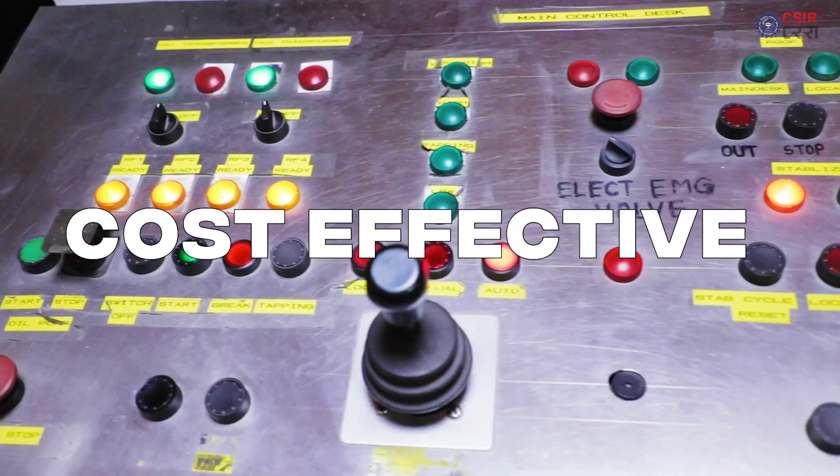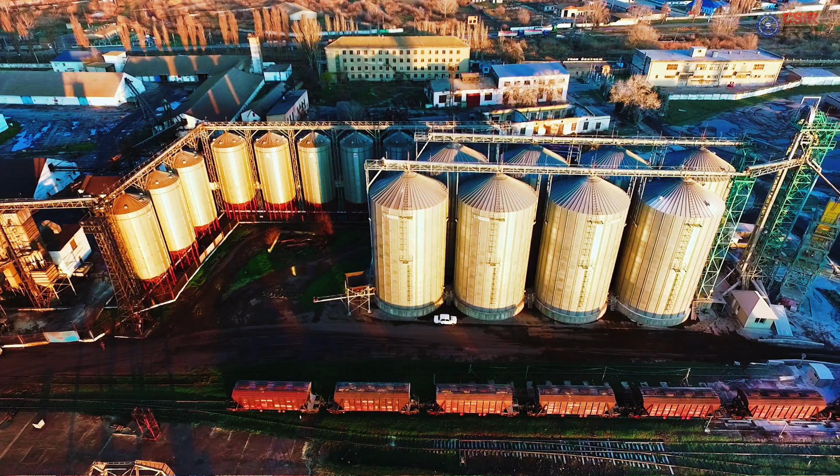Globalization has opened the doors of economic development for so many countries. There is a serious concern regarding how far we are being able to save the environment without hampering its constituents.

India holds world's second largest road network in terms of length. Roads are considered as lifeline of the nation and an important prerequisite to accelerate economic growth. Roads serve as the lifeline of trade and economy. India holds world's second largest road network in terms of length.

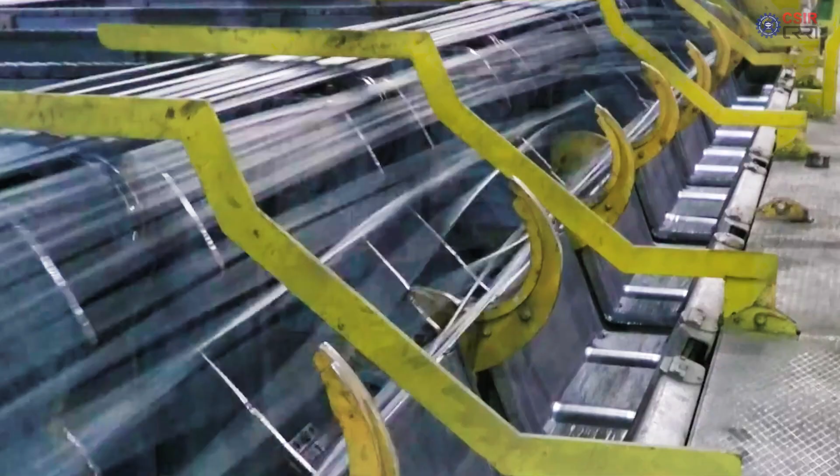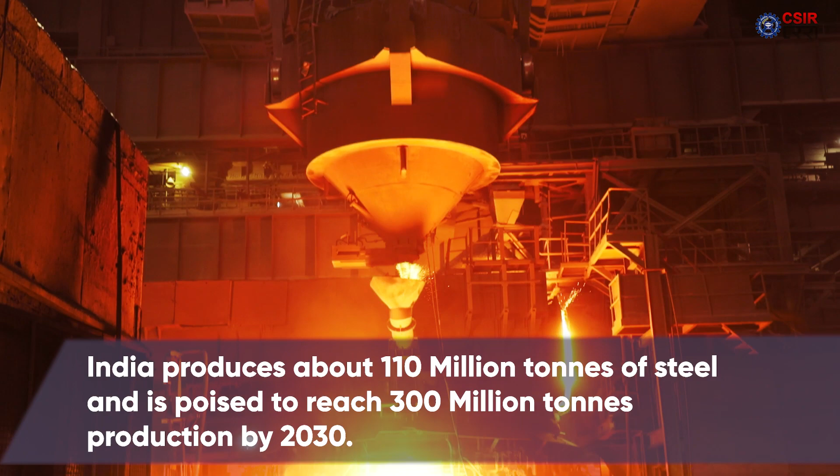Besides that, under Government of India's ambitious road development program such as Bharatmala and National Highway Development Program, massive road development will be carried out in upcoming decades. Iron and steel industry are pillars to a country's economic and infrastructure development. India produces about 110 million tons of steel annually and poised to achieve 300 million tons steel production by 2030.

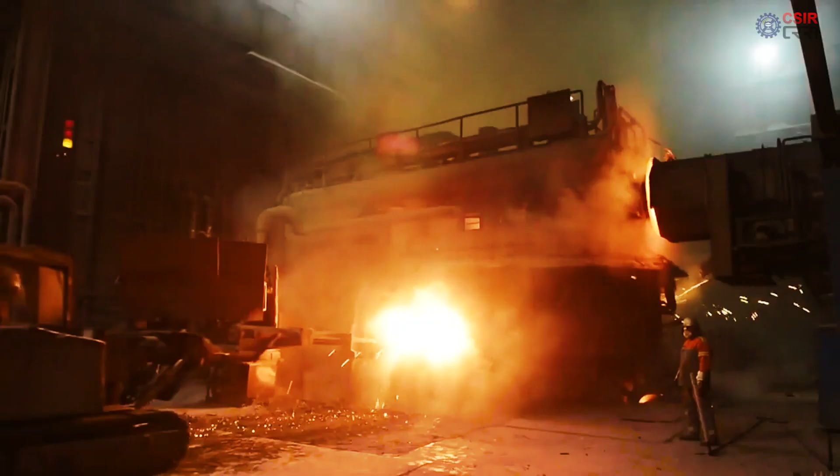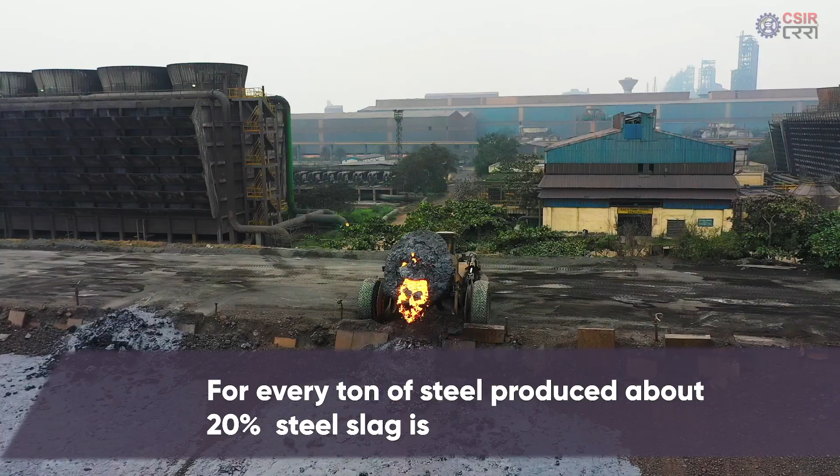Along with steel, about 19 million tons of steel slag is generated every year during the refining process of steel from different steel plants situated across India. For every ton of steel produced, about 20% steel slag is generated. Most of the slag are dumped in the nearby areas of steel plants, which becomes the source of water, air, and land pollution.

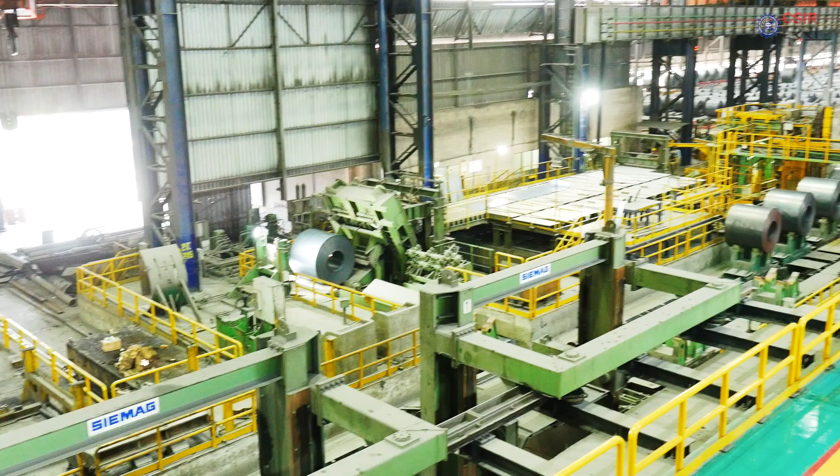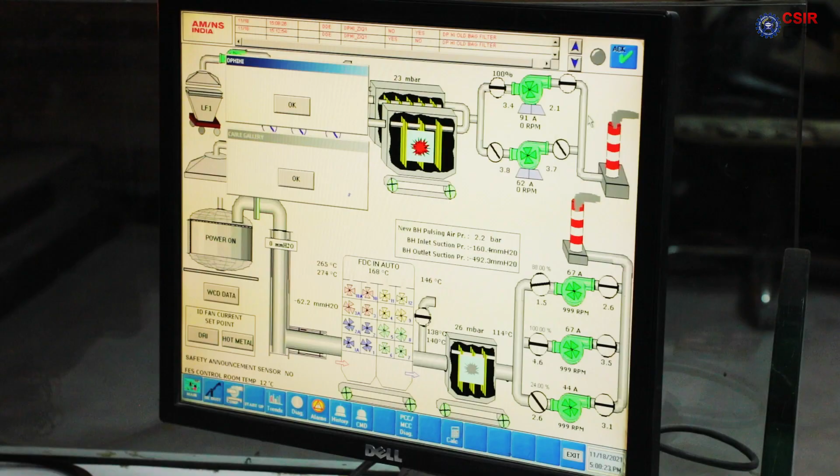India is the second largest steel producer in the world, and presently 19 million tons of steel slag is generated in our industries. So that will be a big solid waste problem for the industries. Therefore, Ministry of Steel, along with 4 steel industries, namely ArcelorMittal Nippon Steel India Limited, Tata Steel, JSW and Rashtriya Ispat Nigam Limited, have come forward and requested CRRI to develop technologies for them so that steel slag can be utilized in road construction.

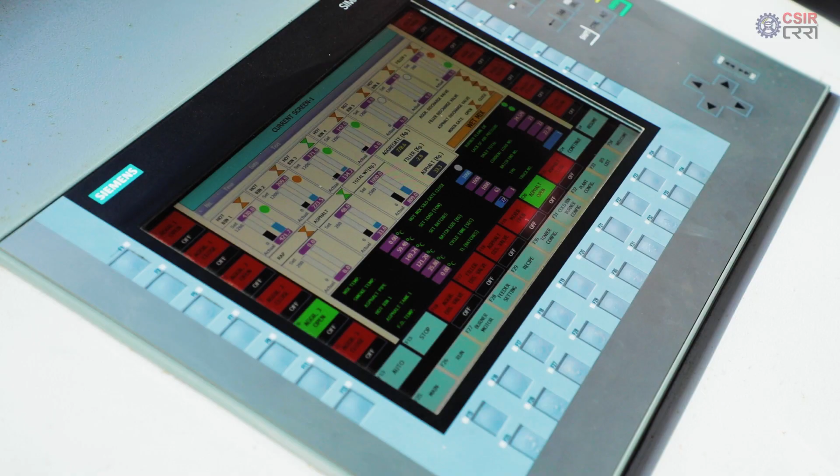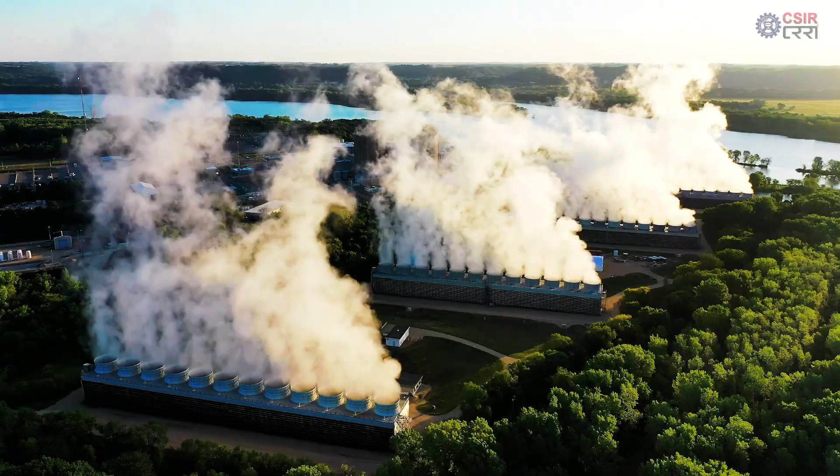Every year, multi-billion tons of natural aggregates are used in the construction and maintenance of road network in the country. The idea of environmental conservation gains real momentum if we can conserve natural resources and use them in a manner that they are sufficiently available for the coming generations as well.

ArcelorMittal Nippon Steel India, under CSIR-CRRI technological guidance and supervision, has shown that processed steel slag aggregates can be used for construction of durable roads, thereby providing a cost-effective and eco-friendly green alternative to conventional road construction materials.

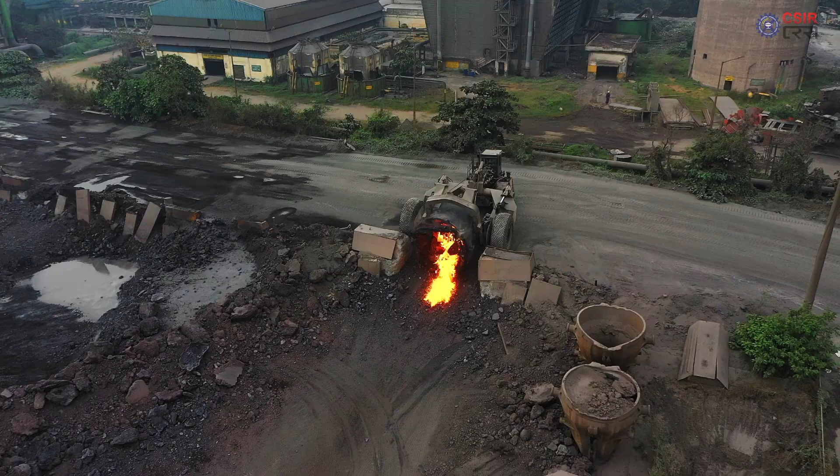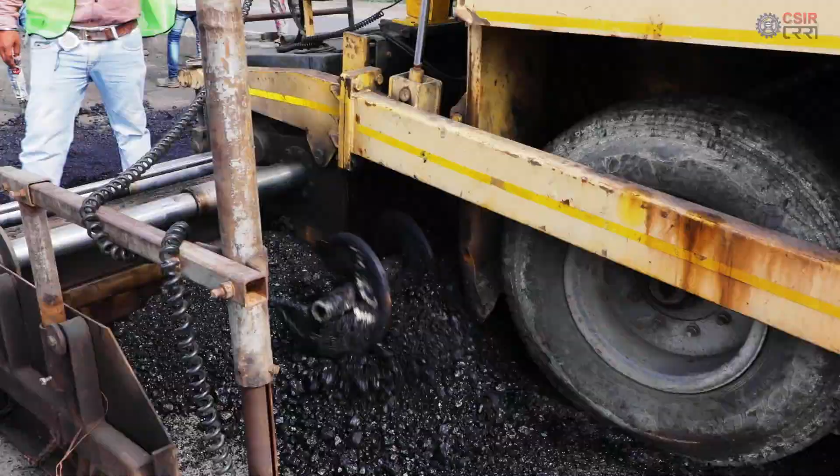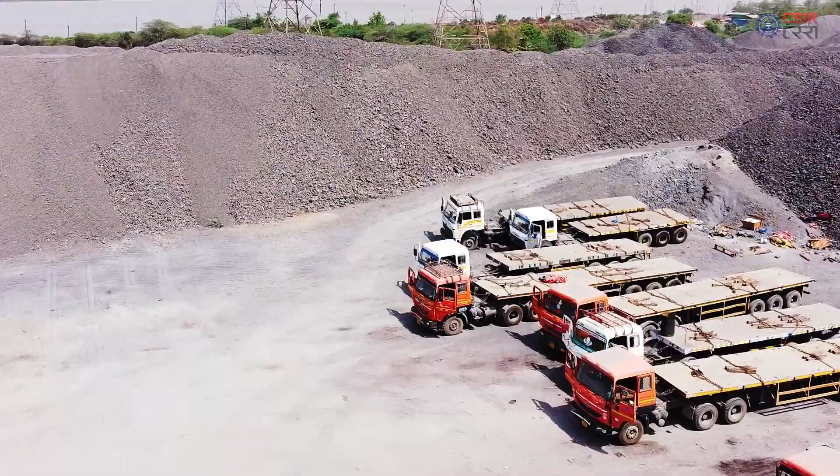Steel slag, which is rich in iron content, can become the source of good quality steel slag aggregates for potential utilization as substitute of natural aggregates in road construction. Despite that, a large amount of steel slag generated from steel industries is disposed of in stockpiles today. As a result, a large area of land is being sacrificed for the disposal of this useful resource. The concept of sustainable development thereby comes into play.

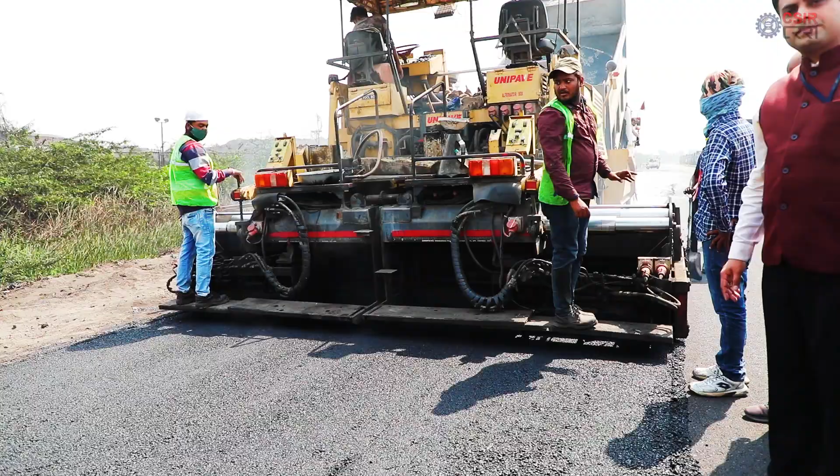Utilization of processed steel slag aggregate as substitute of natural aggregates in road construction has shown quite promising results. Recently, CSIR Central Road Research Institute along with ArcelorMittal Nippon Steel India has constructed a 1 km long 6-lane bituminous road at Hazira, Surat using processed steel slag aggregate.

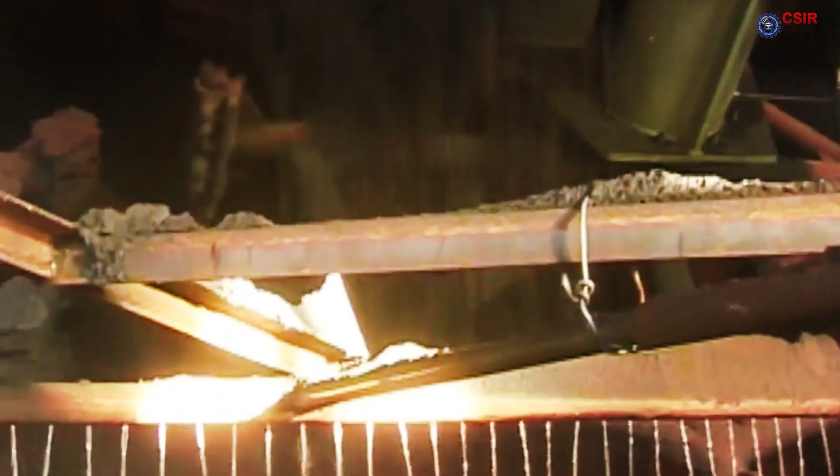Iron ore is sourced from mines and sent to steel plants for first making iron out of it. In the form of pellets, sinter or lumps, the ore is reduced in blast furnaces or DRI plants to form hot metal or sponge iron. This is a raw material for steel making process. During steel making, flux is added to catch the impurities present in iron during the primary refining process.

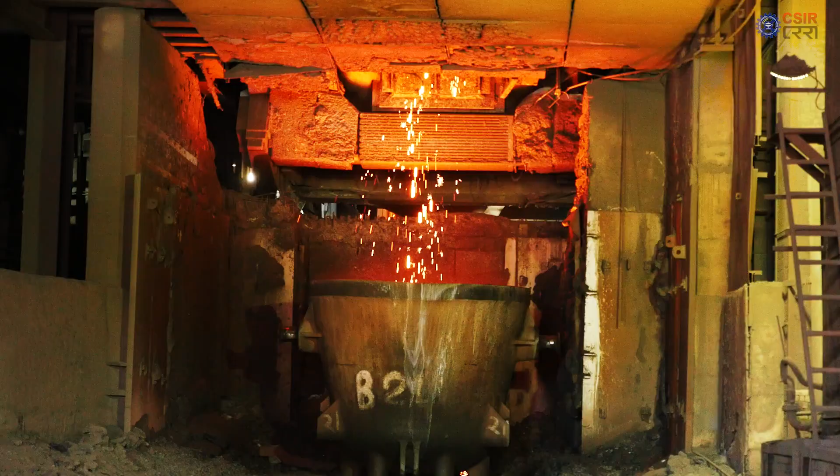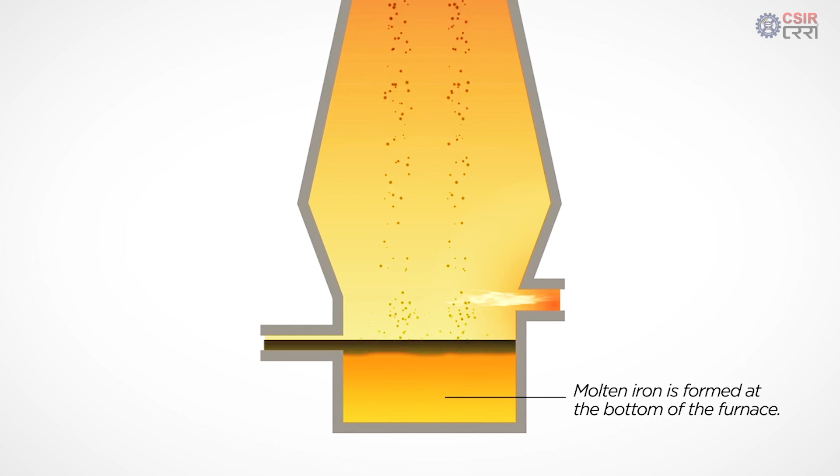The flux along with impurities form a semi-molten mass called slag that floats on the liquid steel in the steel-making furnace. Slag is a mixture of oxides formed by silica, alumina, calcium, magnesium, and iron predominantly. The purified metal is taken out from the bottom and slag is taken out from the top of the furnace. The molten slag at 1500 to 1600 degree temperature is poured into the slag pits for cooling.

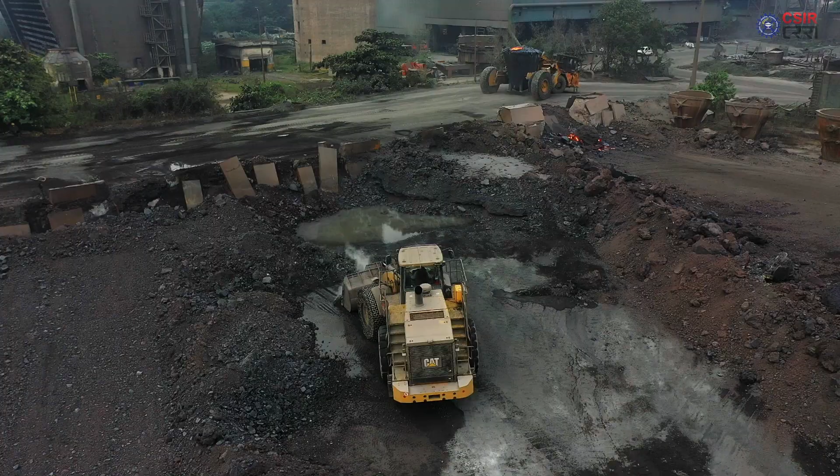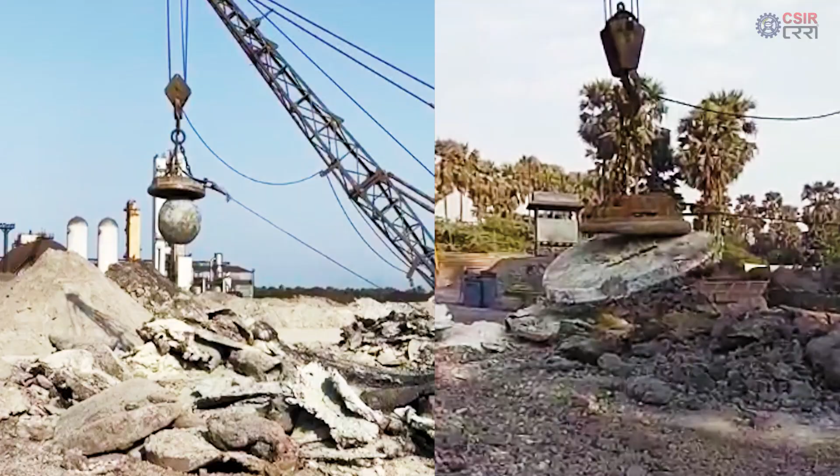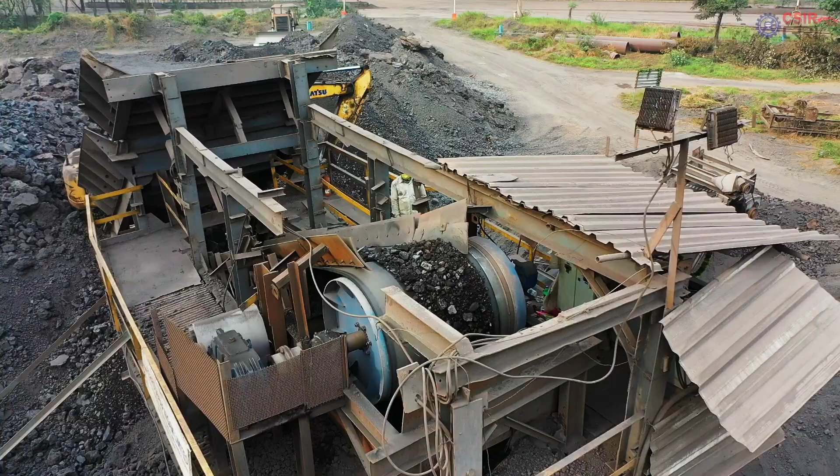A customized cooling process is developed by CRRI to control and develop microstructure of slag that work as stable aggregates. Once cooled, the slag is crushed into smaller sizes. Large chunks are broken by a balling crane where large steel balls are dropped on the slag boulders to break them down. The finer slag is then passed through a metal recovery unit where large magnets separate the entrapped metal pieces in the slag. The non-magnetic slag is then crushed and screened to various sizes based on application.

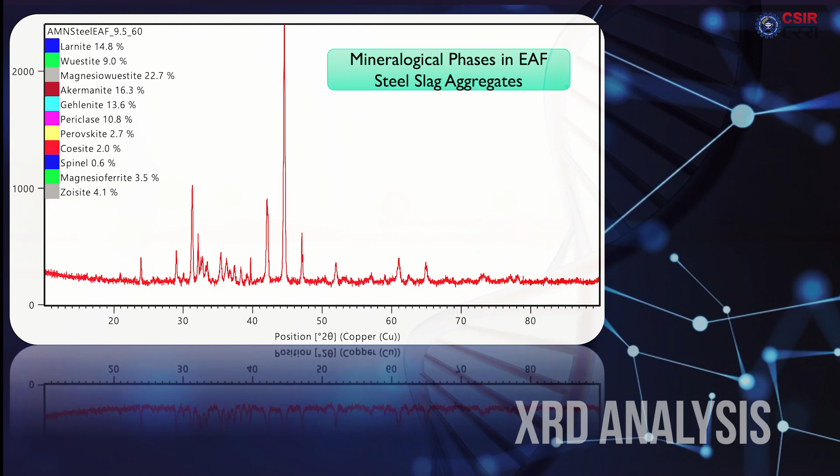Quality of the aggregate. X-ray diffraction analysis of processed steel slag aggregates is carried out for mineralogical phase identification and compositional analysis. Processed steel slag aggregates developed through controlled cooling process shows the crystalline phases as found in good quality natural aggregates obtained from igneous rock groups.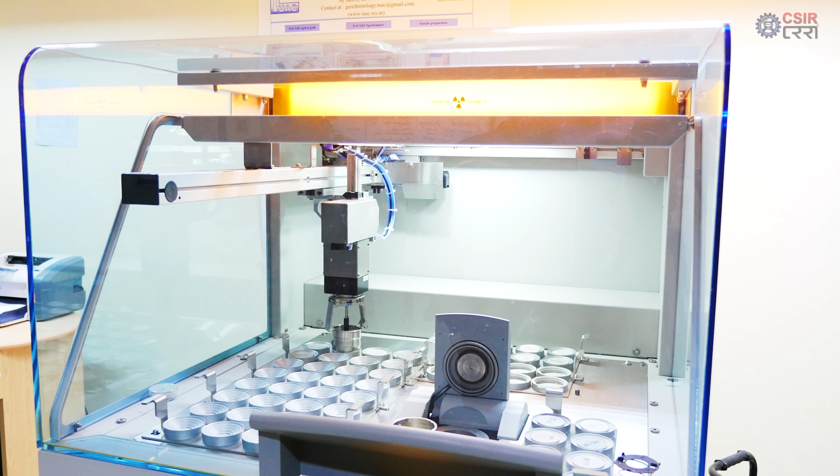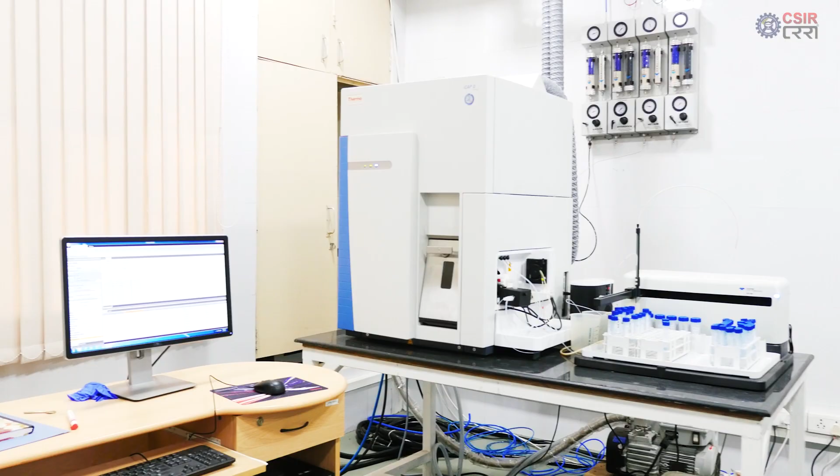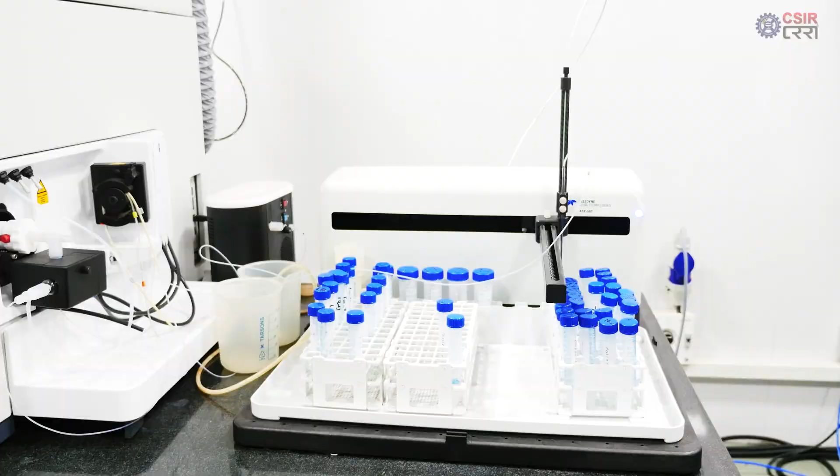Chemical composition of steel slag aggregates in oxide form is determined through wavelength dispersive X-ray fluorescence spectrophotometer. Processed steel slag aggregates are also tested using inductively coupled plasma mass spectrometry to rule out the possibility of any heavy metal leaching under adverse environmental conditions. TCLP study conducted using ICP-MS technique showed that processed steel slag aggregates are safe for various road applications.

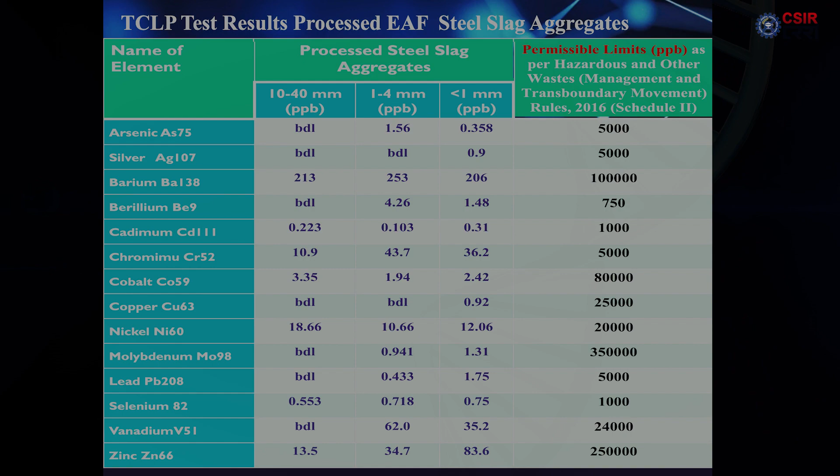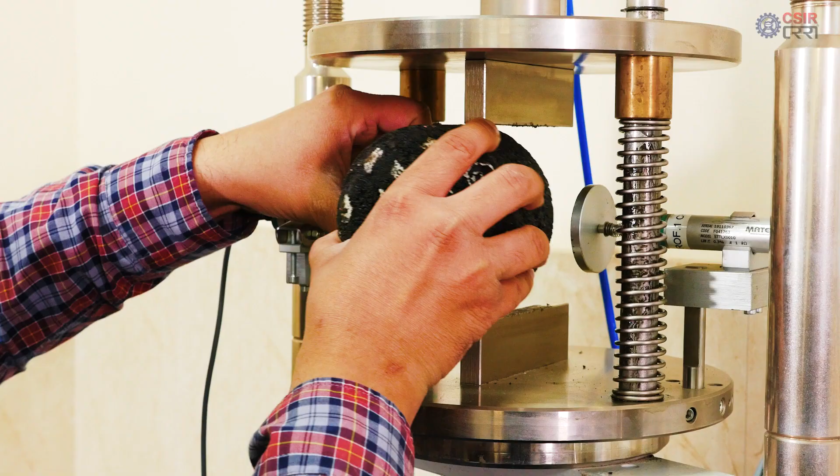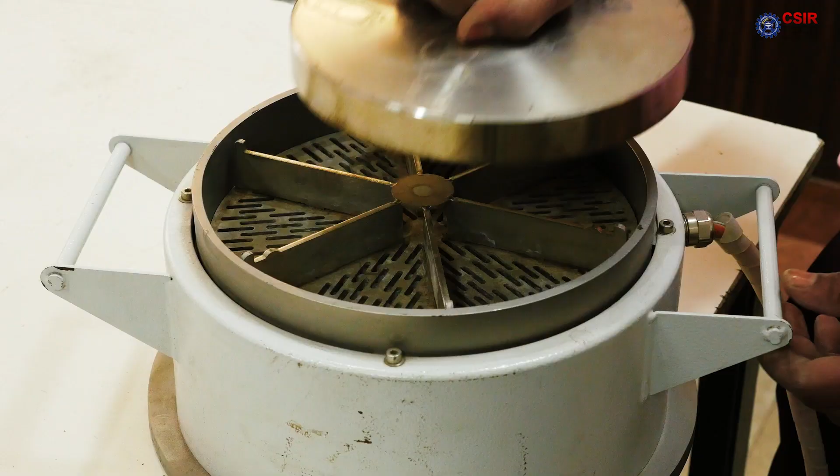Physical and mechanical characteristics of steel slag aggregates are established through a variety of tests to assess its suitability as road construction material. The CSIR Central Road Research Institute research laboratory used a world-class testing facility for aggregates testing. Its most important properties are grain size distribution, resistance to crushing, abrasion and polishing. The volumetric stability of the slag is also verified by an expansion test.

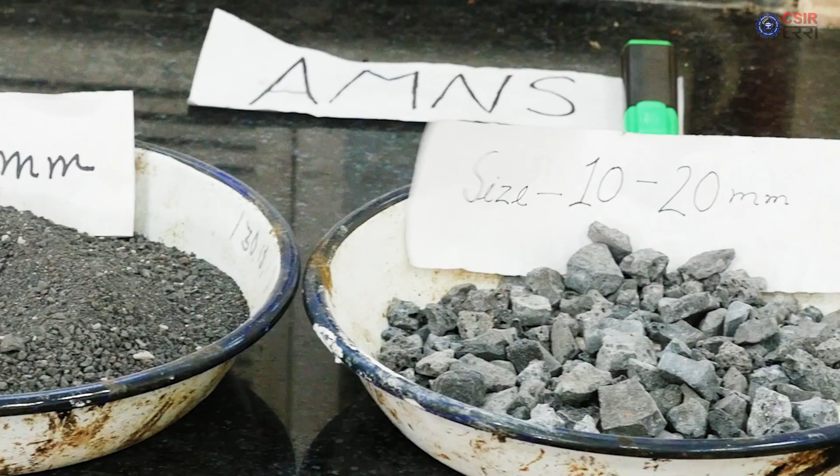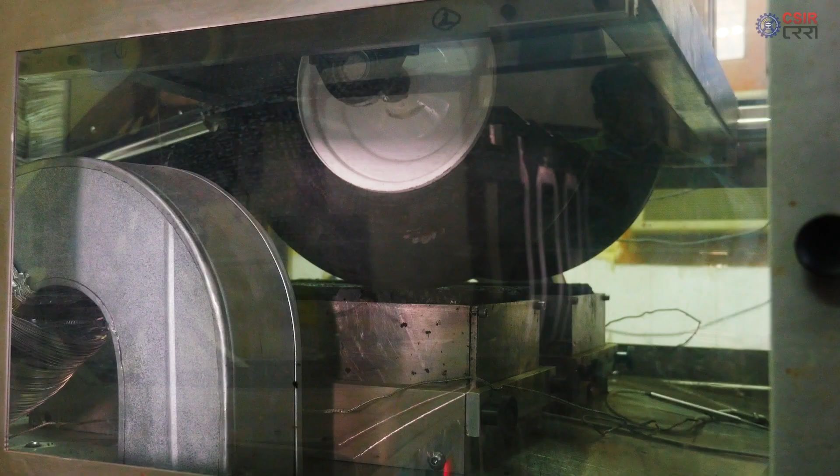Mechanical characterization of asphalt mixes prepared using processed steel slag aggregates is carried out through the state-of-the-art testing facility comprising Marshall stability, indirect tensile strength determination, and rutting resistance. Resilient modulus of steel slag asphalt mixes is also determined to design the steel slag road for different axle loads and traffic conditions.

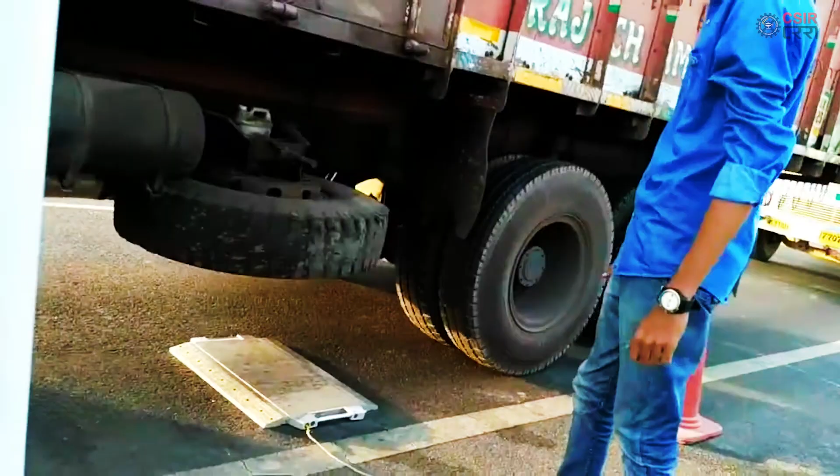Scientists at CRRI have investigated the use of steel slag as an aggregate for bituminous road construction. The best management option for this byproduct is its recycling as road-making aggregate. In India, Surat has become the first city in the country to get a processed steel slag road built as part of a joint venture project between CSIR Central Road Research Institute CRRI, Union Ministry of Steel, government think tank Niti Aayog and ArcelorMittal Nippon Steel India at Hazira, Gujarat.

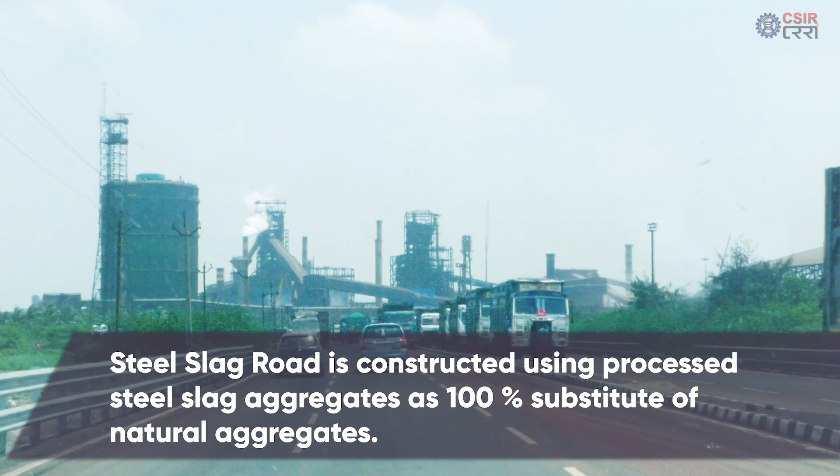Around 1 lakh ton of processed steel slag aggregates has been utilized as a 100% substitute of natural aggregate and good earth for construction of this road. This road connects NH6 to Hazira port and is subjected to heavy commercial traffic. For the last 1 year, CSIR CRRI is monitoring its performance and we found that this steel slag road is meeting all serviceability parameters as specified for national highways in India.

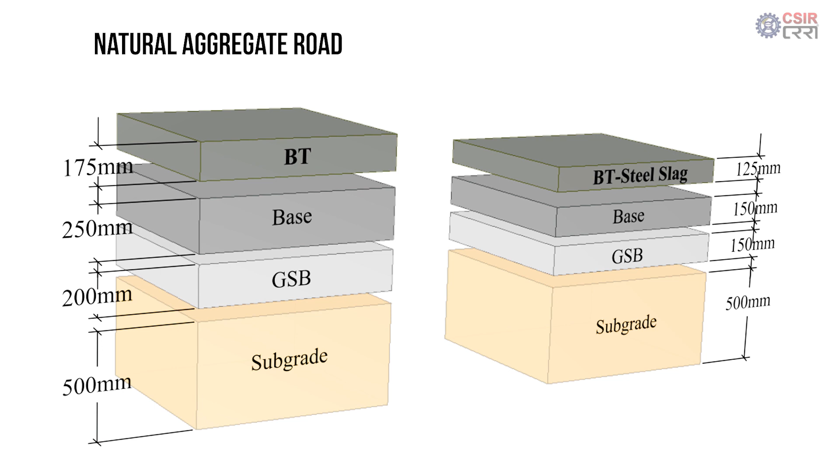Processed steel slag aggregates offer better mechanical load resistance, leading to reduction in thickness of various road layers. Steel slag road at Hazira is built with 32% reduced thickness for 100 MSA design traffic and 20 years design life period.

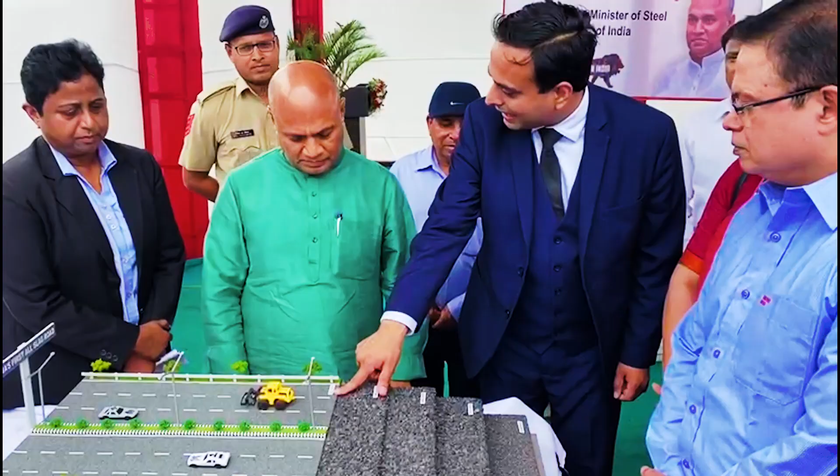And I believe that we must look at alternative forms of steel making, such as making steel from steel scrap, such as the example that we have seen of the 6-lane highway that was built with steel slag in Surat in Gujarat, the first of its kind in the world. And that happens only in India, made in India, ladies and gentlemen.

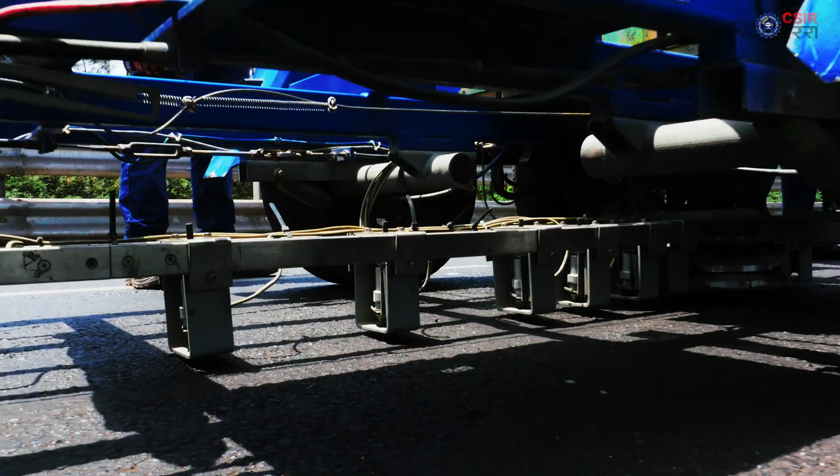Structural capacity of steel slag road is determined through heavy weight deflectometer test. Vertical surface deflection response of steel slag road under variable impulse loads is recorded through a set of geophones. Surface deflections in steel slag road under identical impulse loading conditions are found to be 60 to 70% less than the deflection observed in conventional bituminous road.

Temperature effect. Steel slag road is expected to have higher surface temperature during peak summer time. CSIR CRRI monitored the surface temperature of steel slag road and found that the surface temperature of steel slag road is equivalent to conventional bituminous road.

Benefits. The utilization of waste steel slag for road construction reduces pollution created by heaps of waste dumped near steel plants. The particles of steel waste also get into the air and even seep into the ground, reaching the underground water table. For construction, maintenance and rehabilitation of road network, huge quantities of natural aggregates are required every year. This demand is met through unsustainable quarrying of natural aggregates in many areas, leading to desertification and other serious ecological and environmental impacts.

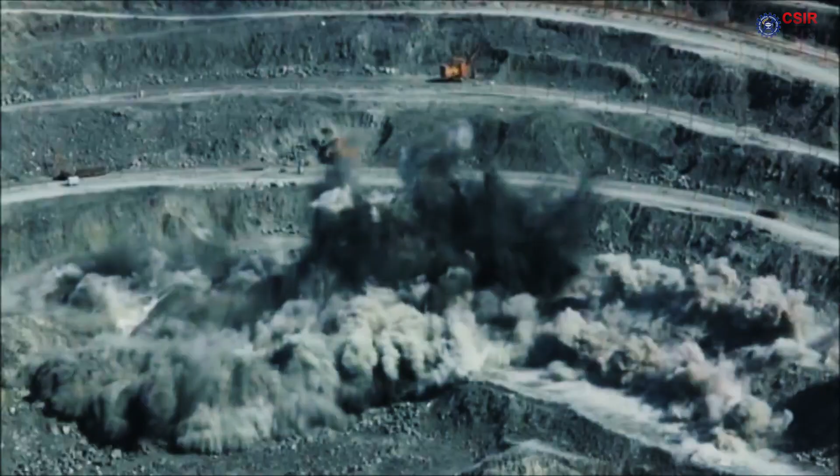I would like to congratulate CSIR CRRI for developing this innovative solution for utilization of processed steel slag in the construction of a steel slag road, which not only reduces the environmental impact of this waste material but also preserves our ecological system by meeting the partial requirement of the natural aggregates.

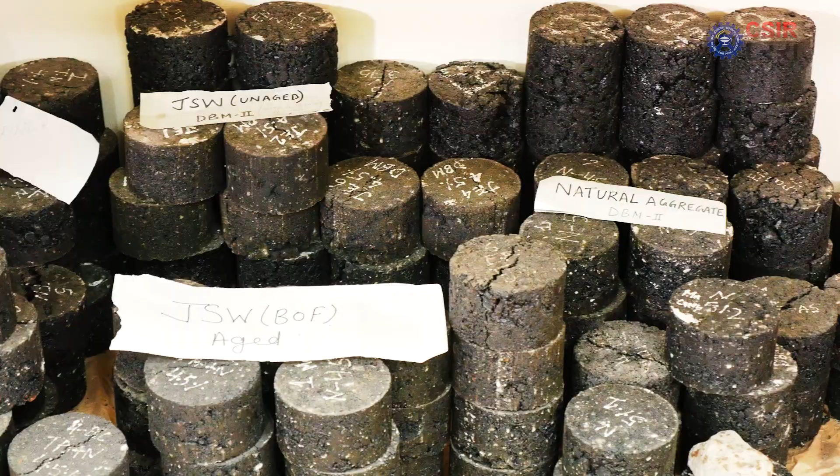The CRRI will now prepare guidelines and specifications for the utilization of steel slag in road construction. The parameters and performance indicators will be incorporated in the road guidelines and will be given to Indian Road Congress, Ministry of Roads and Highways to utilize steel slag for the construction of national highways. I am very sure that in coming years, this steel slag aggregate technology is going to change the way roads are constructed in India, and the problem of waste material will also be sorted out.

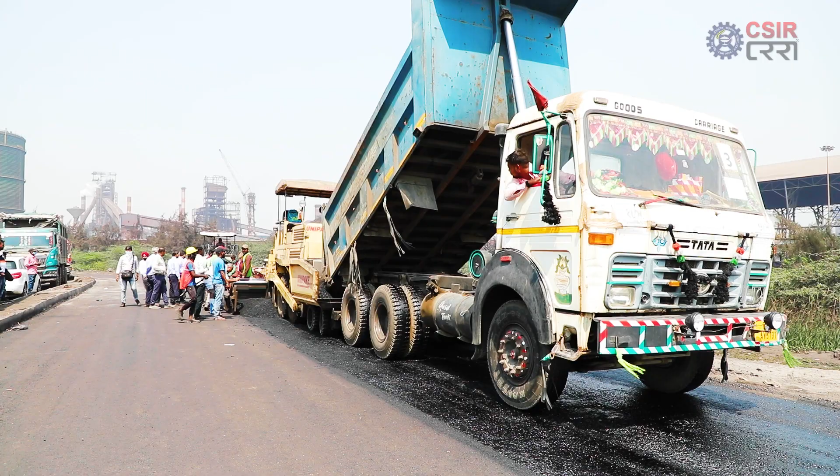Utilization of steel slag as substitute of natural aggregate in road construction is a green initiative under the Government of India flagship program, Clean India Mission and Waste to Wealth. Research has shown the possibility of using steel slag in road infrastructures in order to promote the objectives set out by the Sustainable Development Goals to promote the circular economy and sustainable infrastructure.

CSIR CRRI's innovative first steel slag road in Surat, Hazira has further motivated our vision for a greener India, for a sustainable India, for a rising India. Steel Slag Road. A sustainable green utilization of steel slag in road construction.